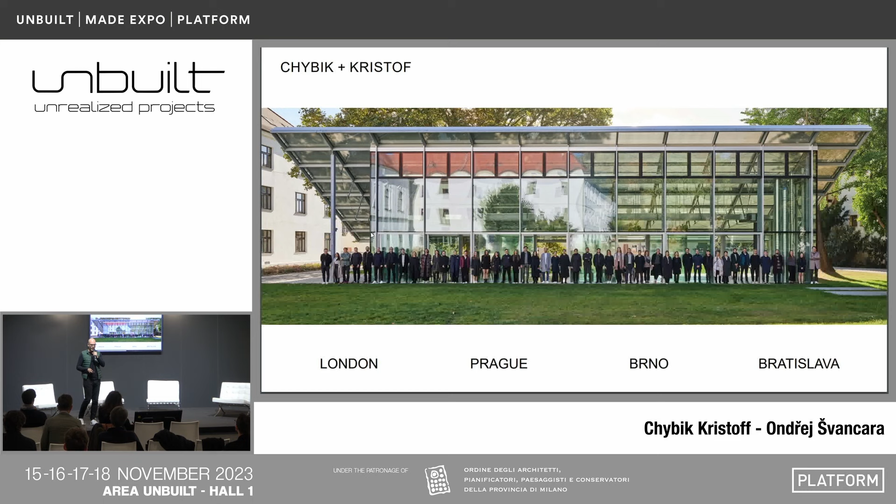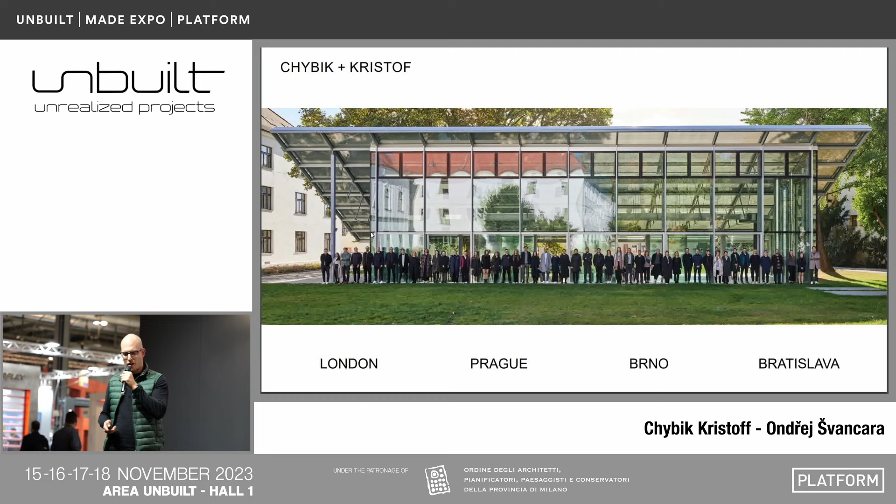Czech-based studio, Czech and Slovak-based studio, Chybik and Kristof, currently settling ourselves in London, in the UK. We are a studio of 60 architects, founded 12 years ago by two of my friends and colleagues, Ondřej and Michal.

Before introducing our unbuilt project, and also to understand the topics and visions that are important to our studio, I think it's good to explain the environment that we started our profession as an architect, and it's Czech Republic. Basically, we all finished our studies, let's say, 12, 15 years ago, together with having an opportunity to get an international education and international work experience, we started a company in an environment that was really fastly developing.

We managed to enter competitions for several large-scale projects, and the environment in Czech Republic was a little bit behind, let's say, Western Europe, with a large need to redevelop and rebuild the existing real estate.

With this environment, we actually managed to deliver even right after school, to compete with, let's say, large-scale competitions with important public projects, and we managed to grow the studio to this size.

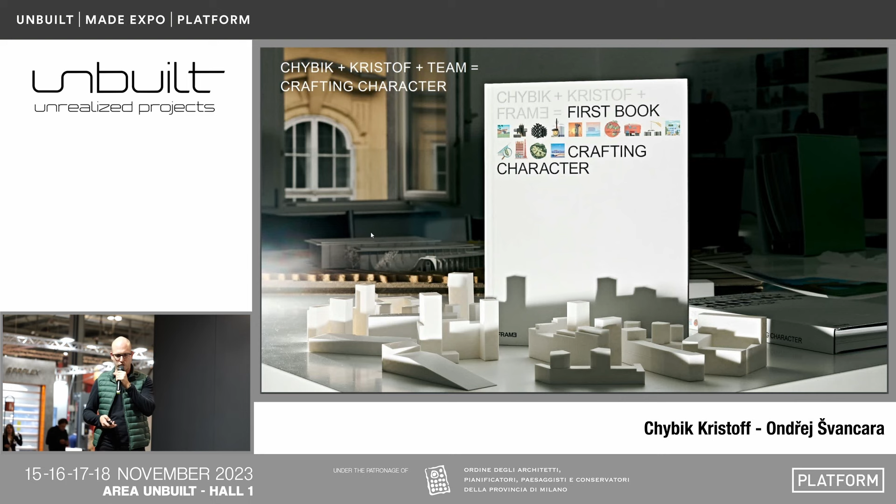This year we published our first monography, our first book, summoning up the first decade of the studio, and it's been issued this autumn. It presents 14 projects, 14 buildings done by our studio. And what's interesting about this book is that the buildings are talking about themselves, about their relation with the end users and with their environment.

Considering the year 2015, we were already thinking of this expo, this whole thing, as kind of a large waste of material and resources. We teamed up with a Czech company producing modular constructions, modular structures, modular buildings, put together this proposal, won the competition, and after the expo finished, we managed to transport this building back to Czech Republic, where it's now standing as the headquarters of the company.

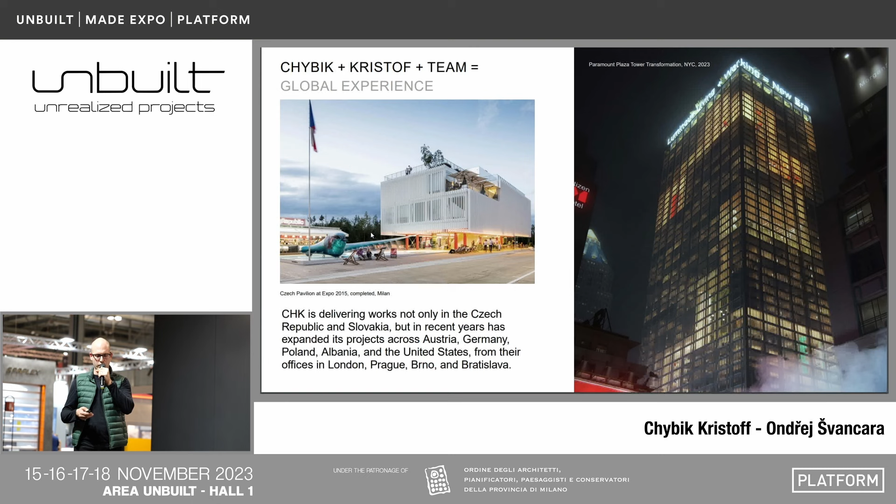On the right side, it's showing more of the ambitions of the studio, and it's a proposal that we prepared together with Thornton Tomasetti, their New York studio, to reuse a vacant office tower in New York City and to transform it into mixed use, including residential.

Now I would like to introduce our unbuilt project. While preparing this entry, I was asked to introduce a project that was unbuilt, but it's important for our studio. So I've selected our competition entry, an unsuccessful one, for the Prague main train station renovation.

It's a recent competition. It hasn't been officially closed. The results are going to be published on the 27th of November. We teamed up together with Colorado-based landscape architect Civitas and delivered a team, were selected to the first round, and didn't proceed to the second round. So actually I'm very curious about the results.

The main topic was to renovate Prague main train station, one of the most important buildings in Czech Republic, one of the most important infrastructure buildings that we have. It's a building that provides the first impression to 70,000 passengers every day.

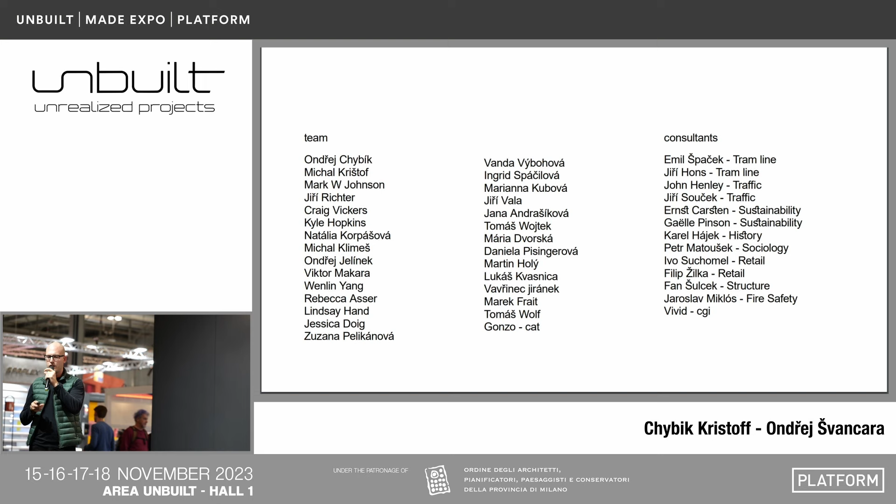When we were thinking how to approach this, we realized this is not only about architecture. Architecture is like 30% of it. We managed to put together a large multidisciplinary team, including not only architects and landscape architects, but also sociologists, historians, traffic specialists, and many others.

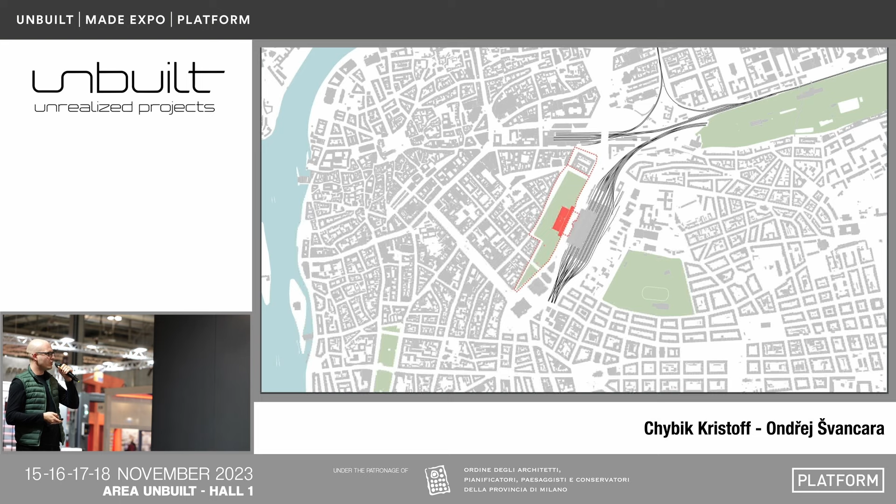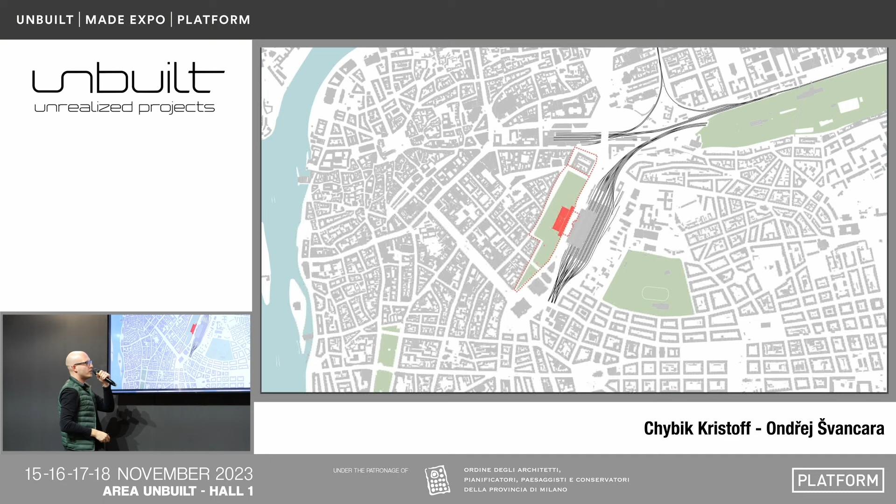Here, to explain maybe a little bit the context of the competition proposal: it asked for a new solution and redesign of the railway station park, the train station park, and a new building for the train station. It's very close to the city center. The park is one of the largest close to the city center, a very important spot.

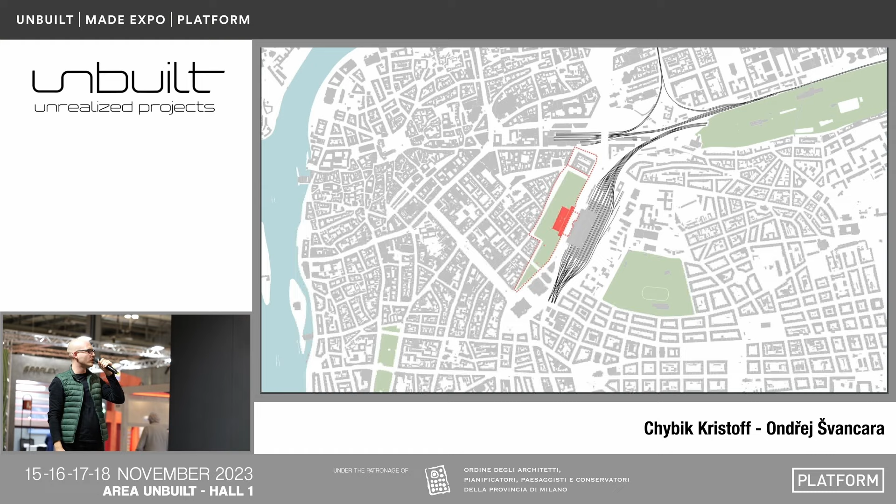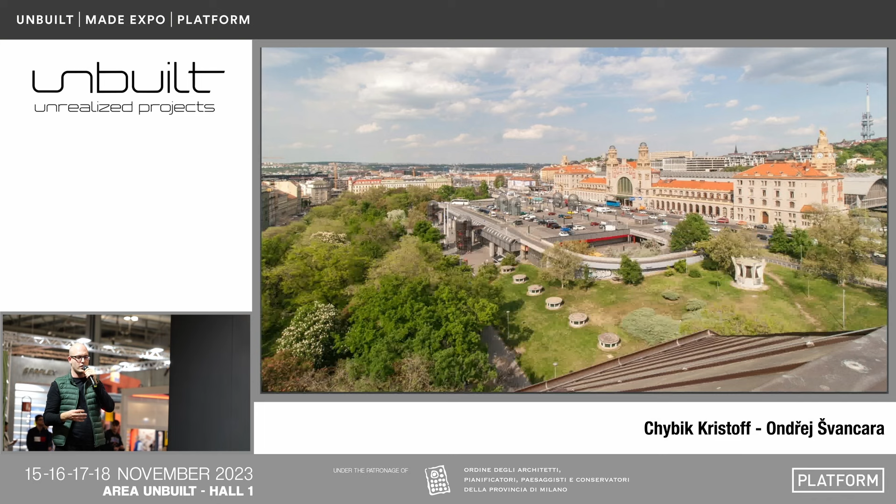The building that was originally built in 1979 was already at that time an addition to the old building above, which is heritage protected, a very nice historical building. The main idea of the design for the 80s building was not to compete with this historical building. It was the most important part of the concept—not to compete with it, but to provide a strong architectural gesture more within its interior and with the interface with the public space than with the volume itself.

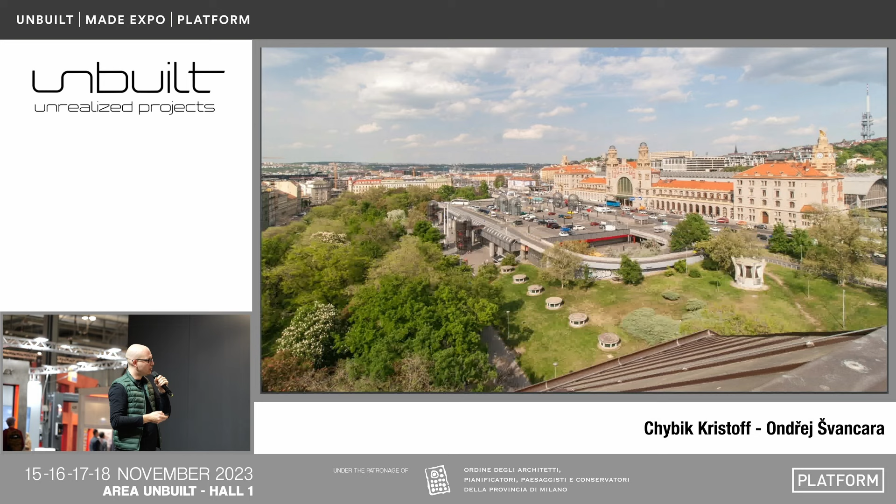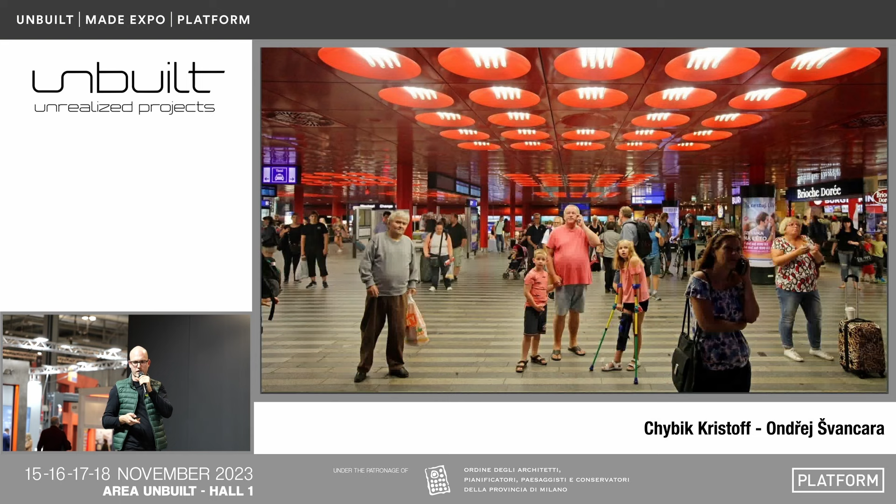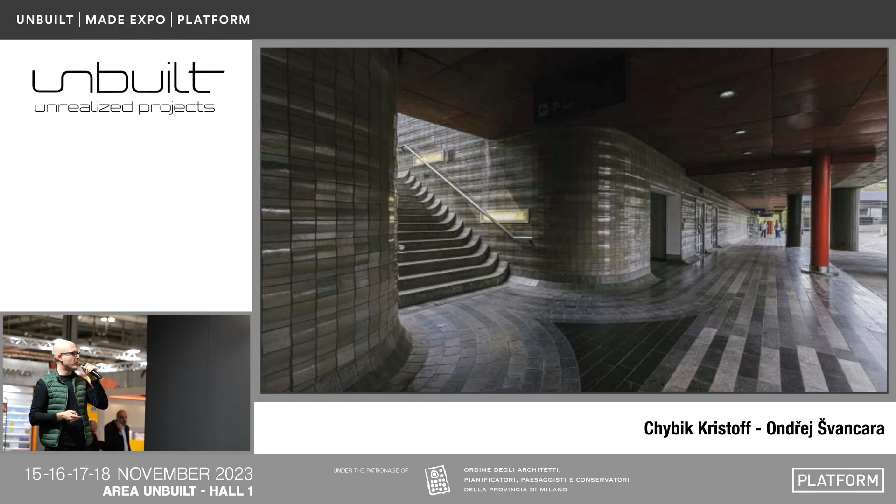The interior concept and the detailing is something that is not heritage protected, not listed, but it has some value and some strong conceptual ideas that we figured out are worthy to preserve and follow. So maybe our architectural proposal doesn't need to include any strong additional gesture.

We decided to follow the principle of palimpsest, which is an old parchment used for writing, then scratched down and rewritten again, where you can see all the layers of history.

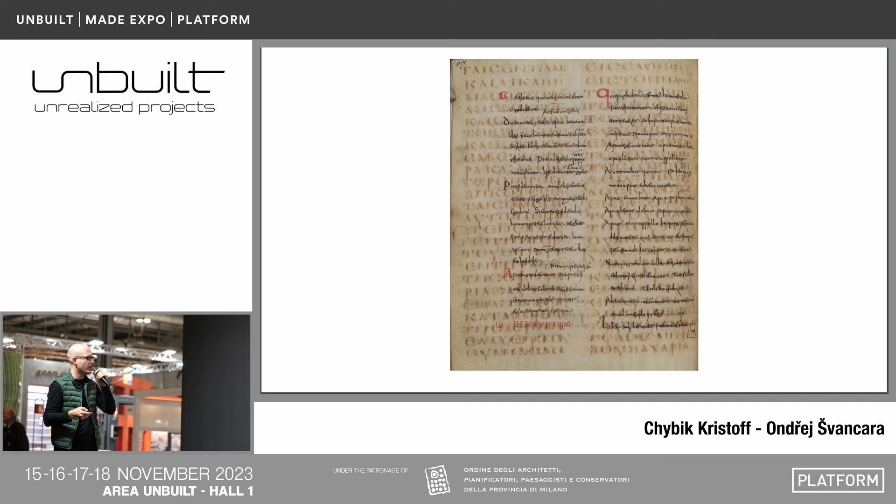Starting with the park, we proposed—we saw that the park itself should provide two major functions: a destinational function and a transit function. For the destinational function, we decided to preserve as much greenery as possible, preserve as many artworks, and create a destination which was not originally there.

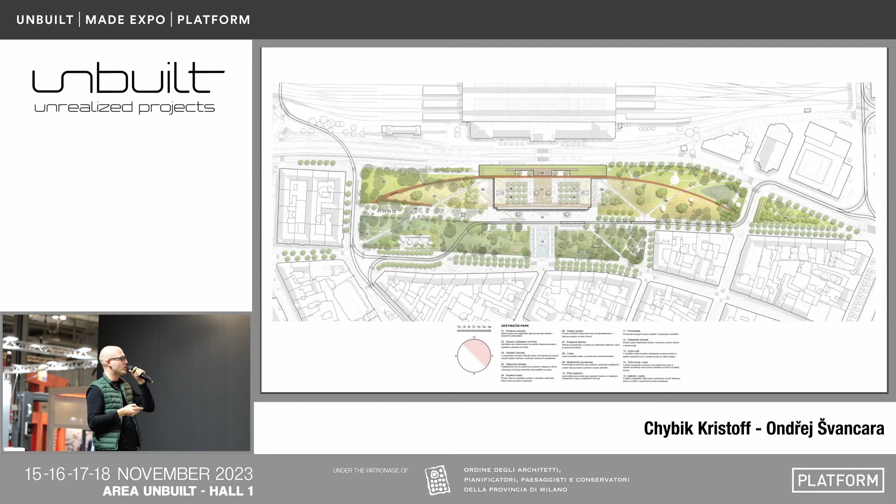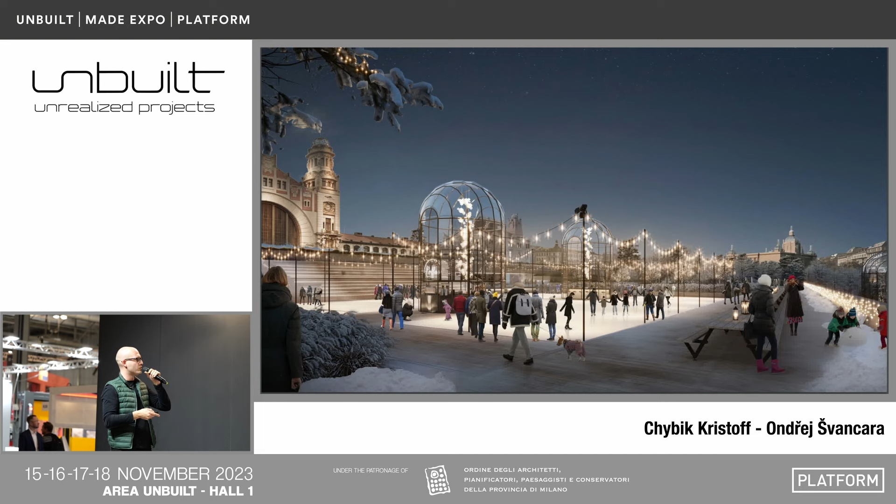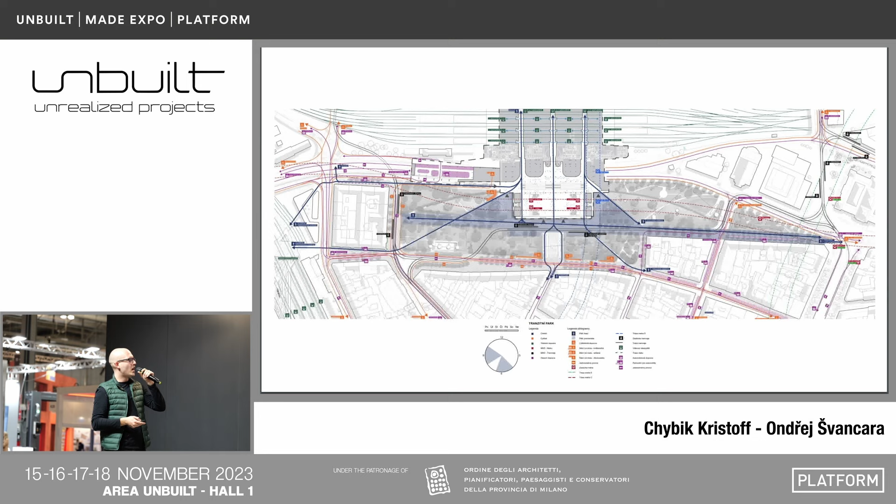We canceled the parking spots on the roof of the train station, of the departure hall, and equipped it with winter-summer activities meant to be the major part of the destinational park. Then we allowed free, seamless transit for all passengers without any unnecessary barriers.

That was the park. With the building itself, we decided to follow the original concept, to let the building blend with the environment, not to compete with the original historical building, but to insert our own layer, represented in the middle by the stairs.

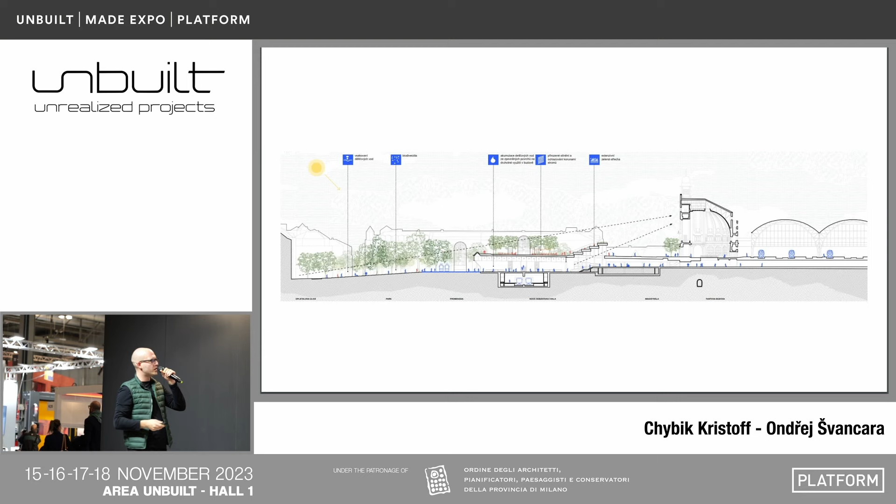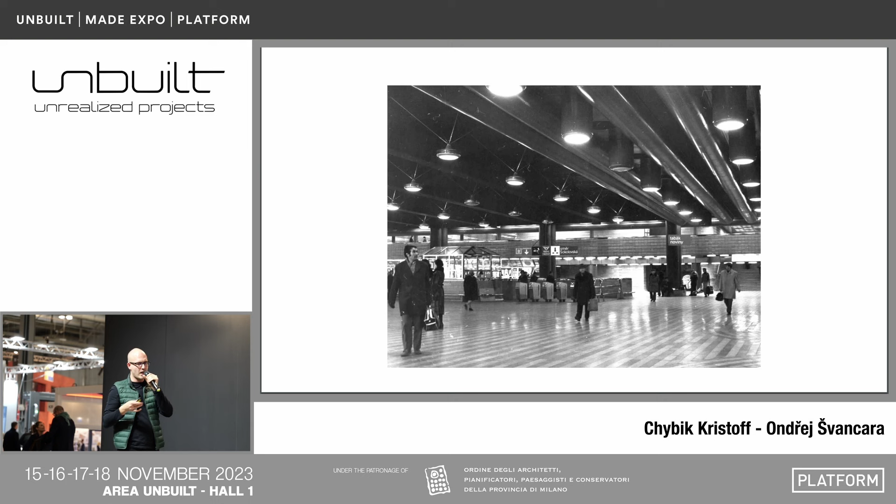The original concept of the building was actually a cave—without any daylight, which is a strong concept but very problematic. These days the building is not very loved by the locals. We decided to use this concept, follow it, and equip it with additional daylight, to create a tunnel for daylight at the end of this cave.

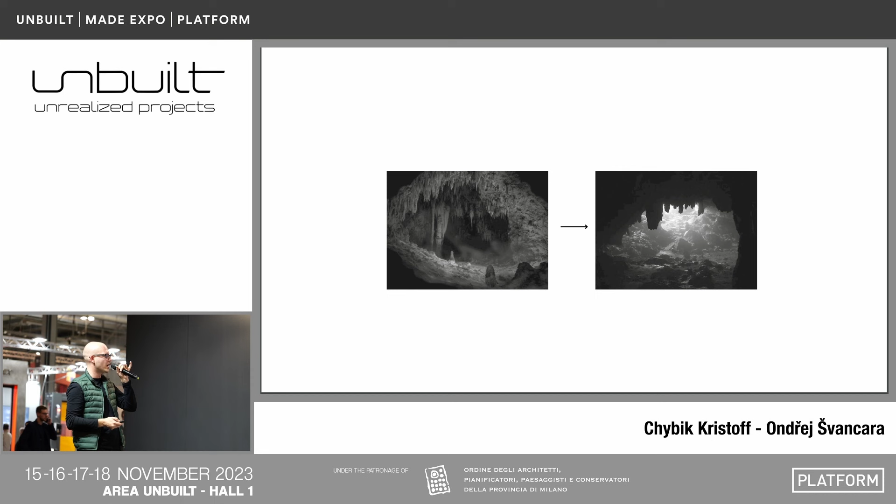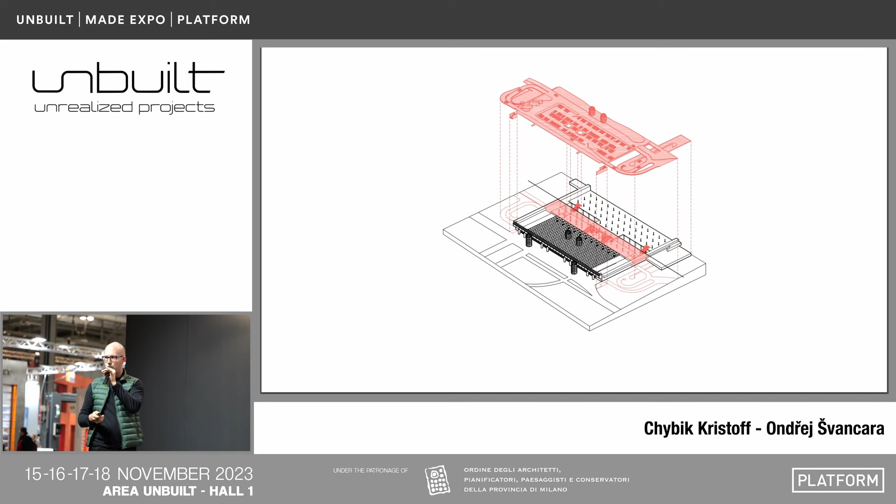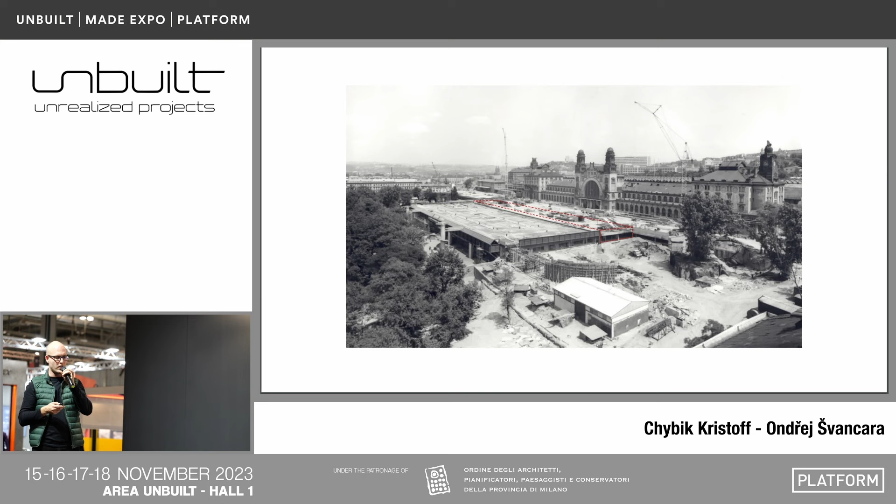We identified that part of the structure is actually a pretty common, normal concrete structure without any heritage values or protected elements. This part of the building we selected for our contemporary intervention. The rest should not be changed or modified much, except for operational changes. In this part, we inserted a new element.

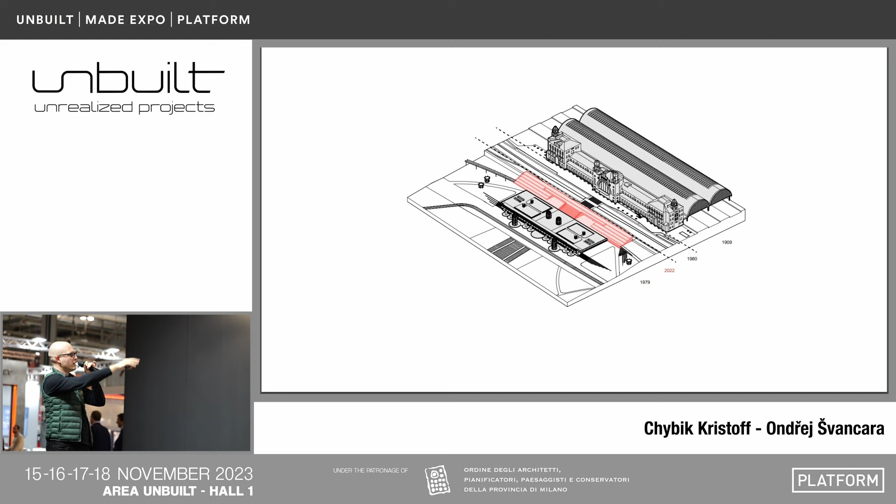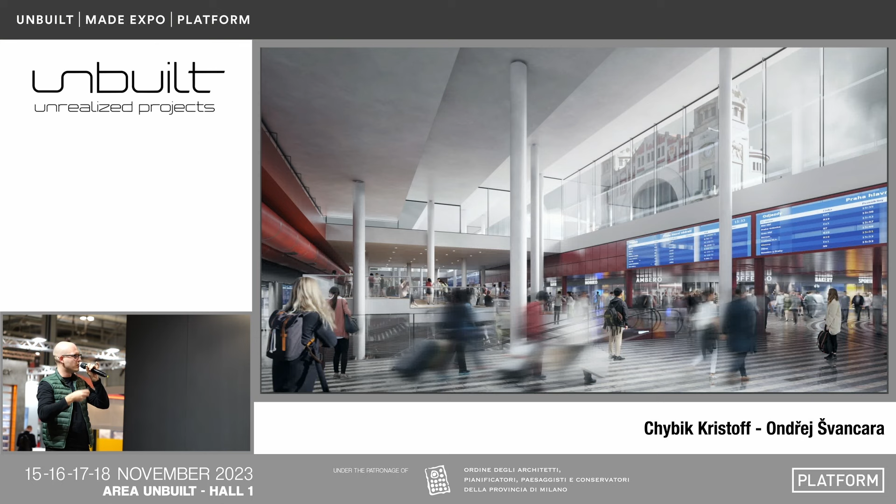Here it's visible starting from the left: it's the 80s structure, the red one is done by us, and the 1909 part is the original building. So it works like the previously mentioned palimpsest of layers of architecture, and we managed to create this new visual connection with the old historic building, while bringing more daylight in.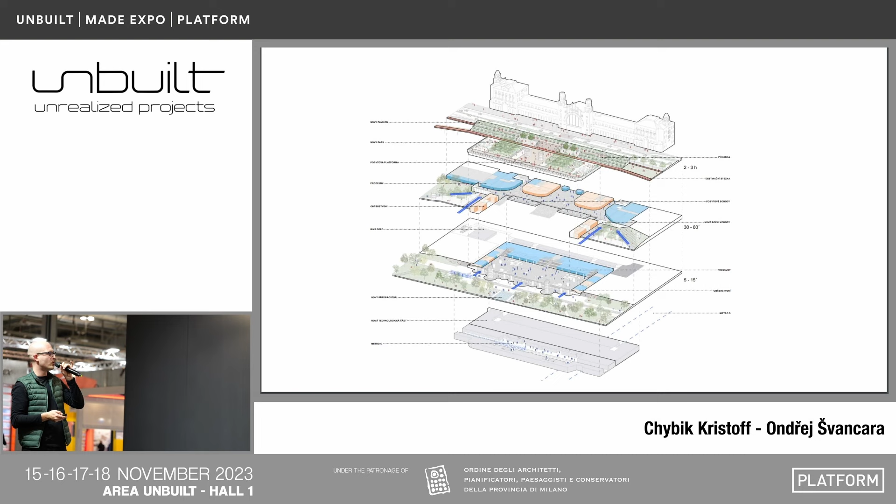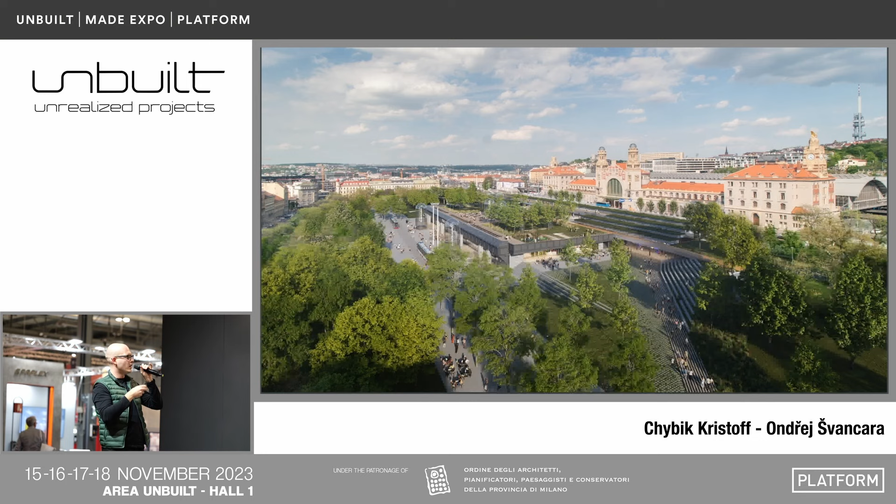Together with all the optimizations of the operational schemes and the retail, we managed to provide the stakeholders, the jury, and all involved authorities a complex scheme for this project. The building was cleaned, there was no need for ramps to the roof, it blended with the park, provided this new destination, and made the indoor environment much better.

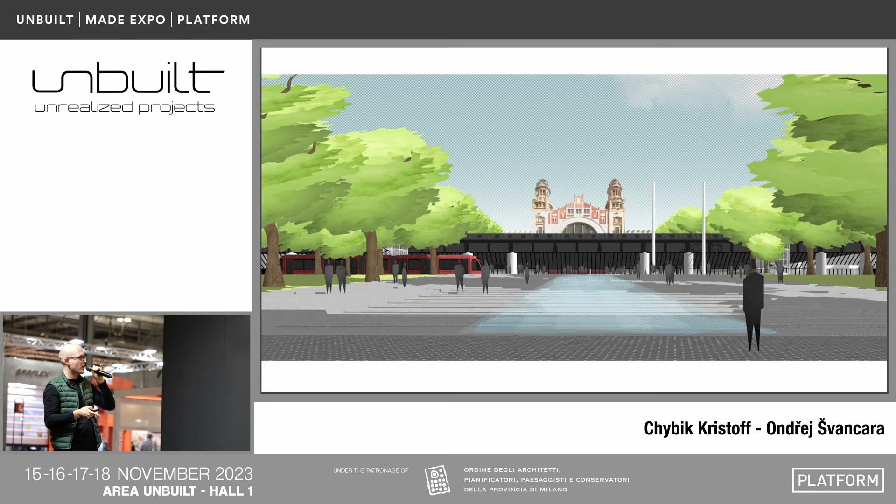Here we even tested the sequence of how it works, if the original context was preserved. While entering the building from the park or from the trams near the train station, you can still see the old building. While entering, you no longer have the feeling of being in a deep dark cave—instead this daylight appears along with the historical building.

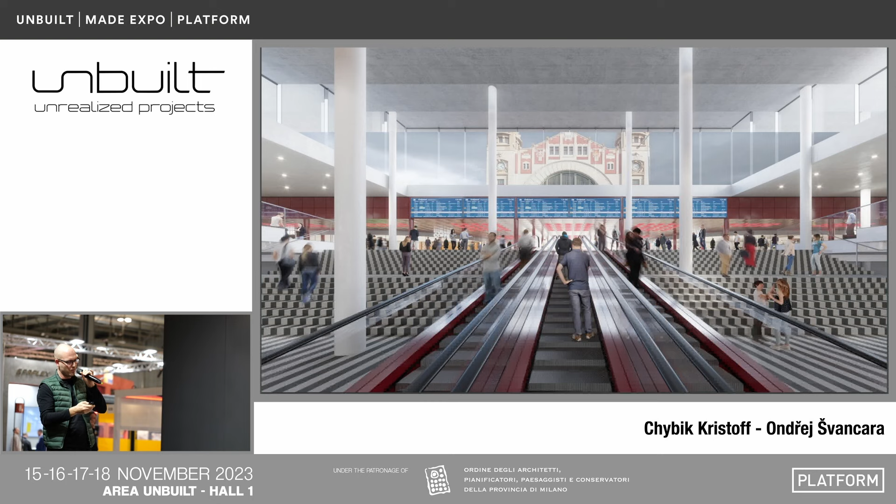And that's all—that was our first round submission. We didn't win, but for us it was one of the greatest experiences, working with an international team on a major, large project, alongside four other wonderful international competitors.

On the 27th of November, the results of the competition are being published, so stay tuned—it's going to be probably very interesting. Thank you very much.